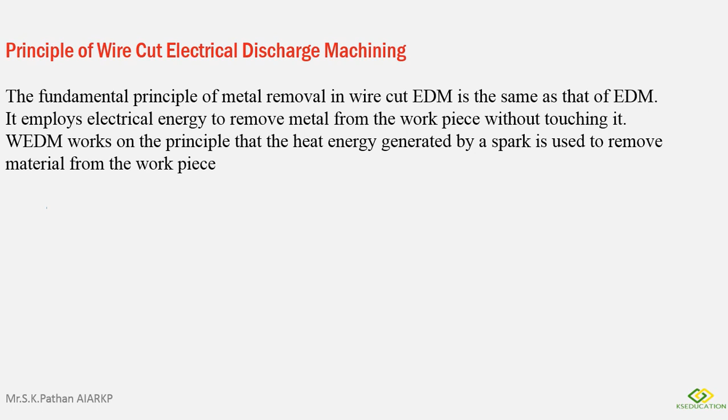WEDM works on the principle that the heat energy generated by a spark is used to remove material from the workpiece.

These are some parts which are manufactured with the help of this WEDM. Mostly WEDM is used to cut dies. Let's see how WEDM works.

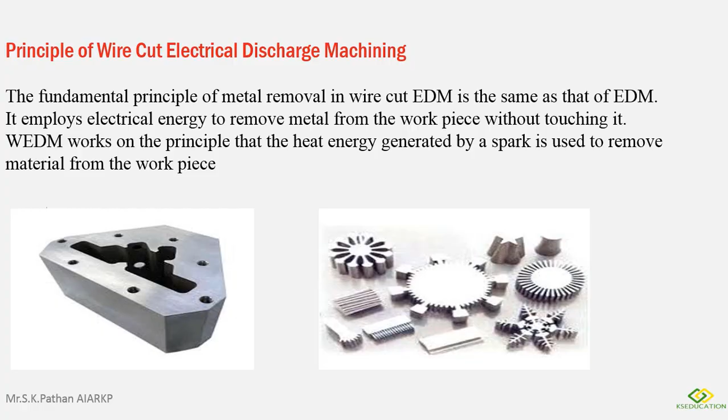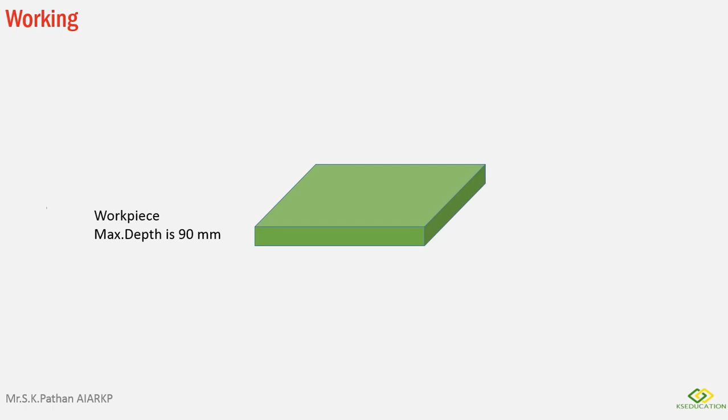So for WEDM, we take a workpiece. The maximum depth allowed in the WEDM is 90 mm.

Through this workpiece, we place a wire, which is a fresh wire, and the diameter of the wire used in WEDM is 0.3 mm and its speed is 2.5 to 150 mm per second.

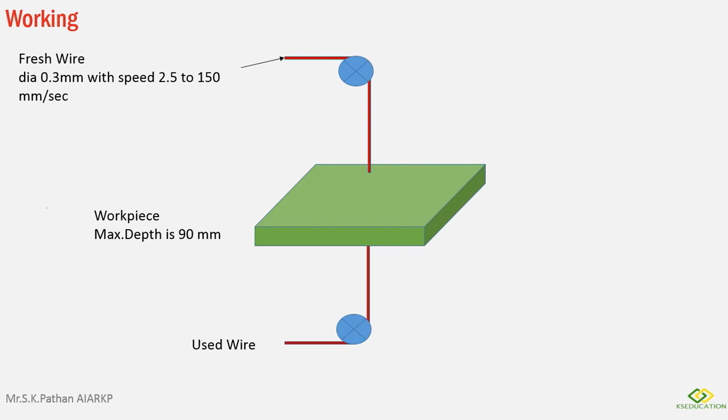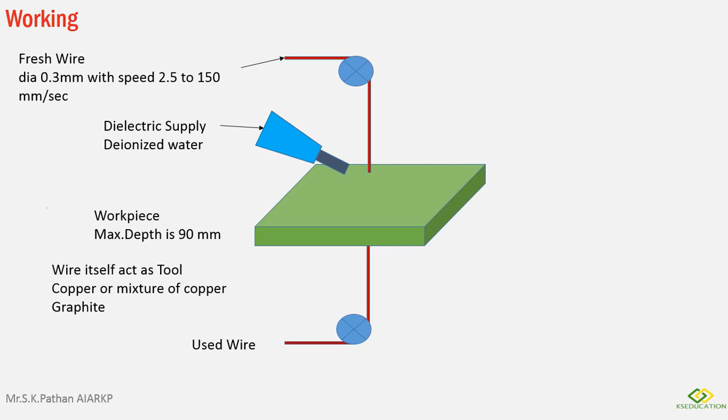A dielectric supply, generally deionized water, is used for dielectric in WEDM. Wire itself acts as a tool, and the material for the tool in WEDM is copper or a mixture of copper and graphite.

This is a wire spool, and with the help of this wire spool, the wire is moved from fresh to used.

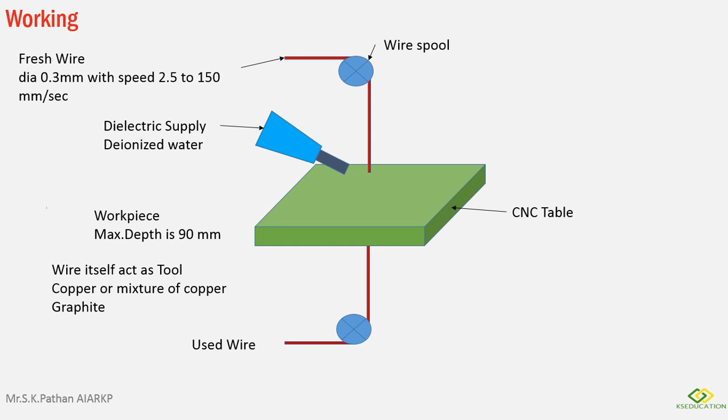A CNC table is provided below the workpiece, and with the help of this CNC table, the material is moved. An electric supply is provided in the range of 50 volt to 30 ampere.

Wire tension is 50 to 60% of its tensile strength. This always needs to be maintained.

When electric supply is on, the current is supplied to the wire spool and the work. So in this case, the wire spool becomes the cathode and the work becomes the anode.

As we have seen in EDM, when the current is supplied to the tool, it becomes electrically conductive and releases negative ions, and the anode releases positive ions. Because of that there is a huge acceleration between negative and positive ions, and this acceleration increases the kinetic energy of the ions, and because of that kinetic energy heat is generated, and this heat reaches a temperature in the range of 8000 to 12,000 degrees Celsius.

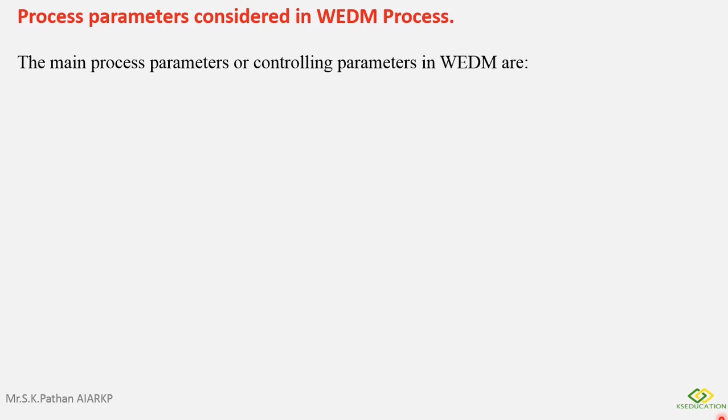Process parameters considered in the WEDM process. The first is discharge current, pulse duration, pulse frequency, wire speed, wire tension and dielectric flow. As I already told you, these process parameters control the process of machining.

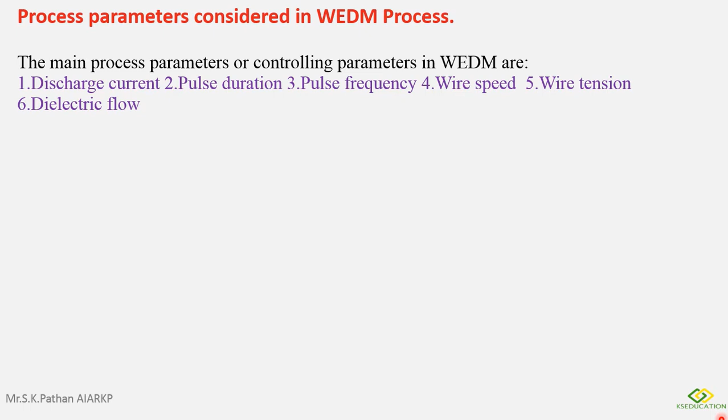Discharge current: material removal rate increases with the discharge current. As the current is increased, material removal rate is also increased, but we cannot go more than 30 ampere.

Pulse duration: increase in pulse duration results in more removal of material, and increase in the pulse duration reduces surface roughness.

Pulse frequency: material removal rate increases with the pulse frequency. The pulse frequency is about 1 MHz, and this results in reduced crater size or better surface finish. So it means material removal rate increases with the pulse frequency, and we will get a better surface finish.

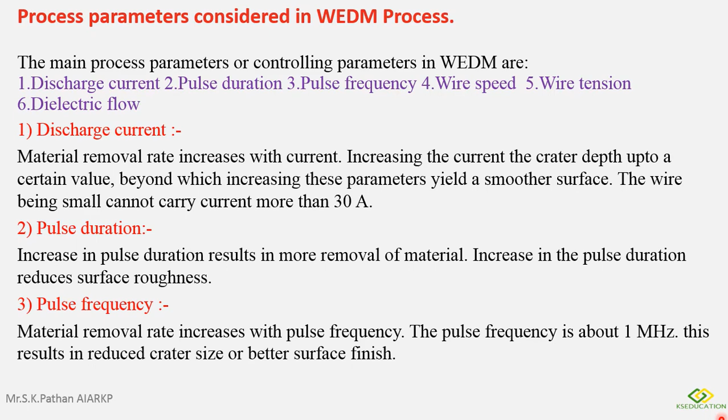Cutting rate: the wire speed moves in the range of 2.5 to 150 mm per second. The cutting rate depends upon the thickness of the workpiece.

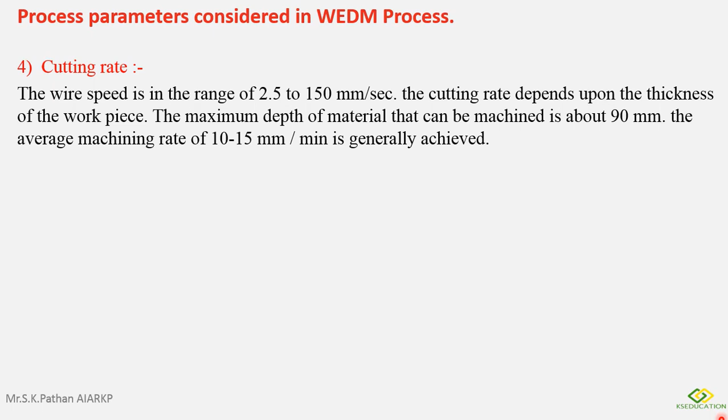The maximum depth of material that can be machined is about 90 mm, as I already showed you. The average machining rate of 10 to 15 mm per minute is generally achieved. Wire tension is 50 to 60% of its tensile strength.

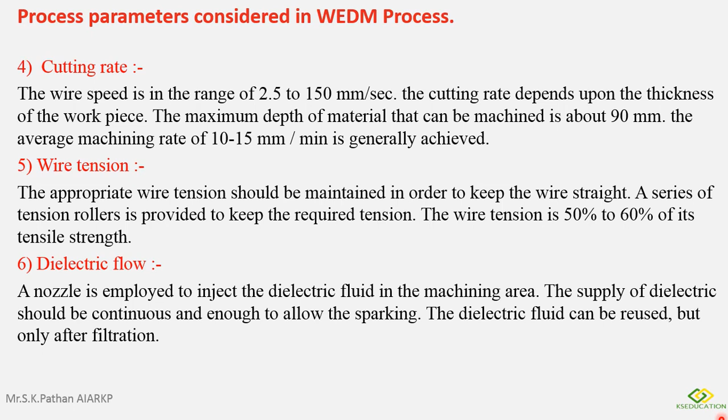Dielectric flow: a nozzle is employed to inject the dielectric fluid into the machining area. The supply of dielectric should be continuous and enough to allow the sparking. The dielectric fluid can be reused but only after filtration.

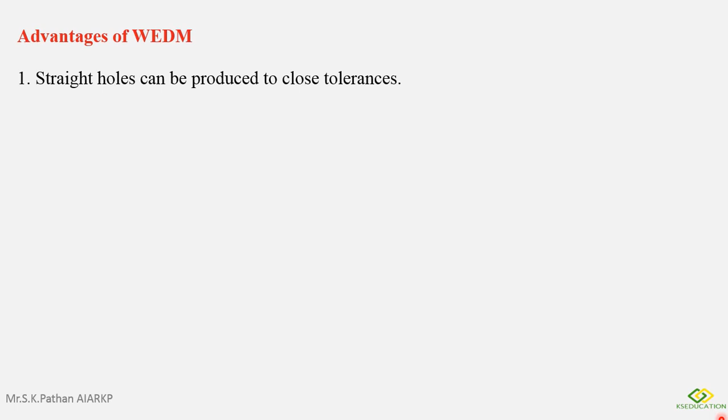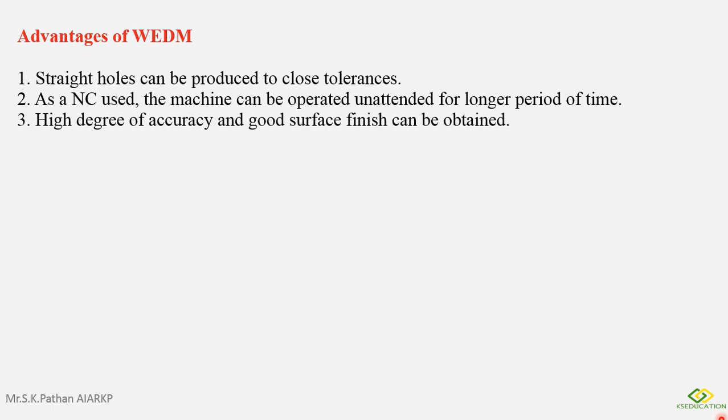Advantages of WEDM: a straight hole can be produced to close tolerances. As NC is used, the machine can be operated unattended for a longer period of time. High degree of accuracy and good surface finish can be obtained. Very sharp angles can be cut with almost no radius.

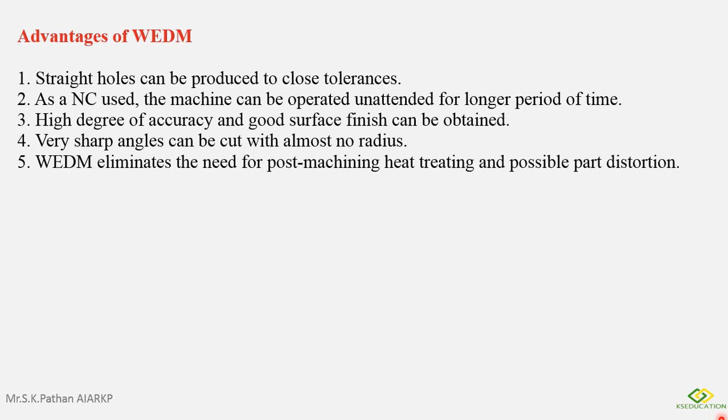WEDM eliminates the need for post machining, heat treating and possible part distortion. The parts produced are burr free.

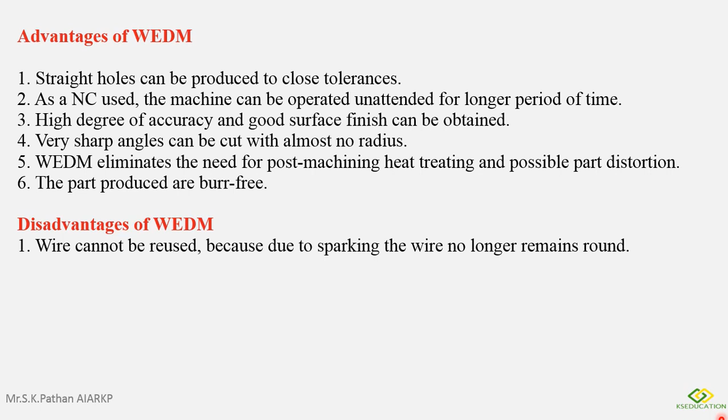Disadvantages of WEDM: wire cannot be reused because due to sparking, the wire no longer remains round. If proper tension is not maintained, the surface finish will be poor. So that's why we have to maintain the wire tension between 50 to 60%, otherwise our surface finish will be poor.

Only electrically conductive material can be machined. The maximum depth of workpiece which can be machined is around 90 mm.

A hole is necessary in the workpiece for machining of a surface which is not at the edges. As I have shown you, the wire is passing through the middle of the workpiece, so in that case we need to pre-drill that hole through some other machining process. If we start the machining from the edges, in that case drilling is not required.

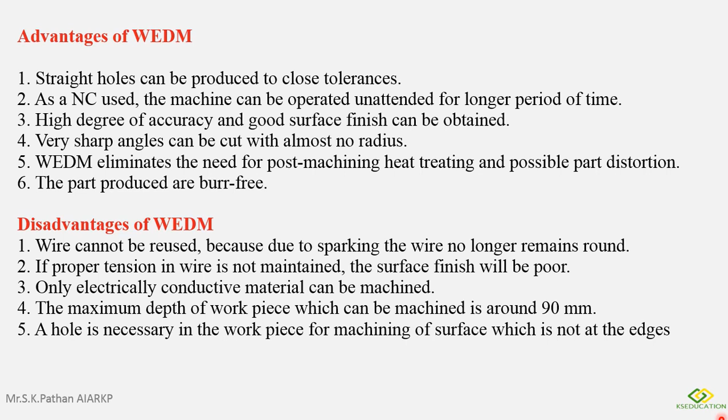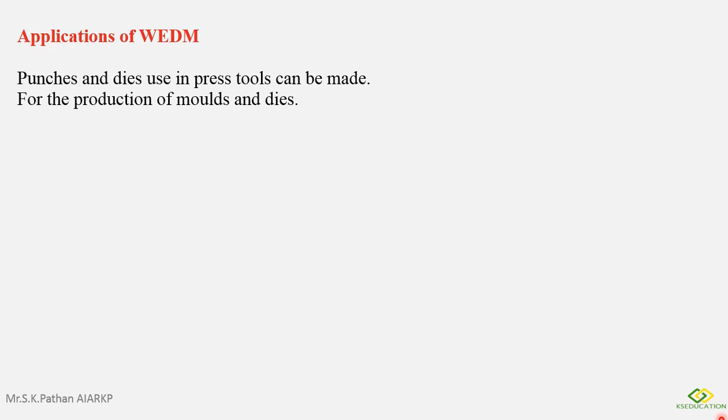Application of WEDM: it is used in punches and dies for the production of molds and dies, and used to cut out complex contours in electrically conductive workpieces.

Now this is an advantage of WEDM, which is basically a disadvantage of EDM. In EDM we are not able to cut complex contours, but here we are able to cut complex contours because of the wire thickness.

The wire thickness used is 0.3 mm. So in that case we are able to cut complex contours in WEDM.

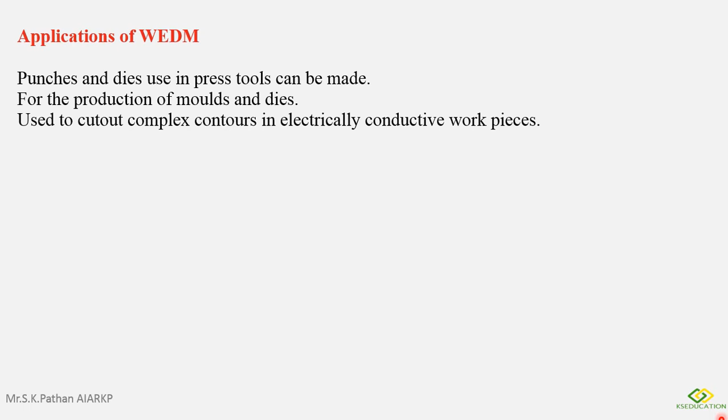Simple flat shapes which usually would be stamped may be a job for wire EDM when they require a superior quality edge. Cylindrical pins as small as 5 mm in diameter can be machined.